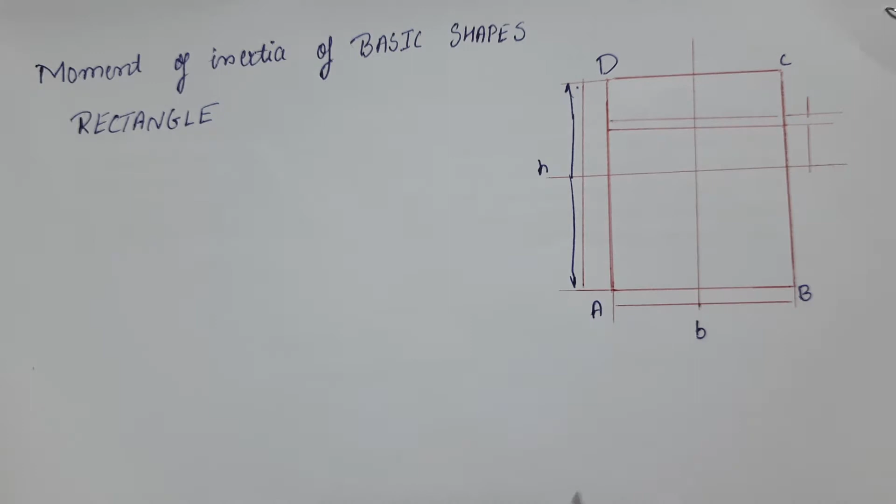So here let us choose a reference axis passing through the centroid of the rectangle. Let this be xc, and this be yc. So this is our reference axis here.

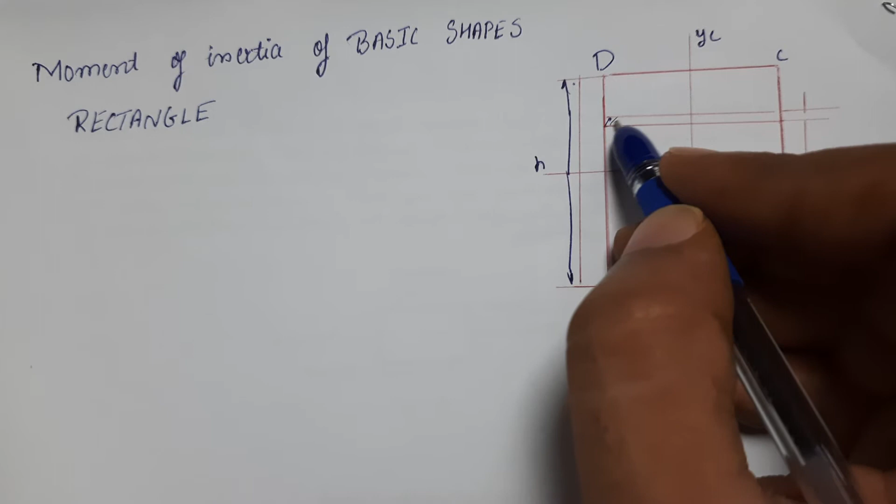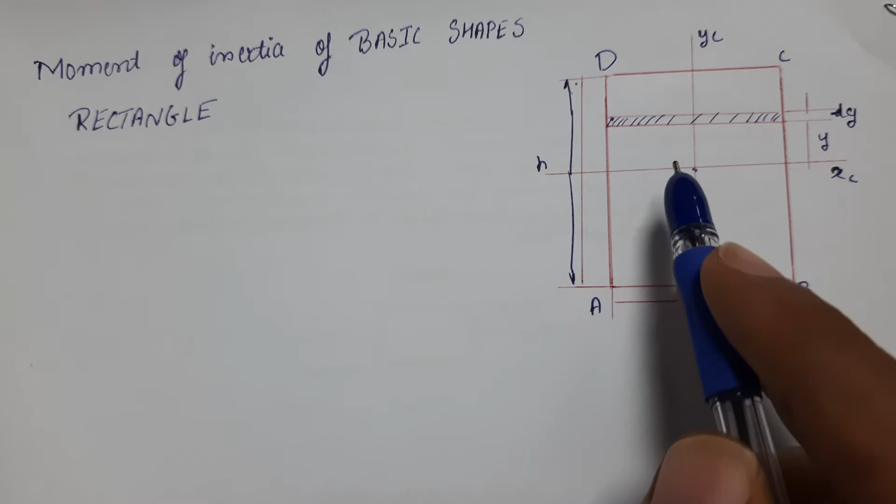Now let us also consider a small infinitesimal strip here of size dy at a distance of y from the reference axis xc, which is the axis from the centroid of the rectangle.

Now the area of this particular strip, dA, is equal to b into dy. So b is the base into dy here.

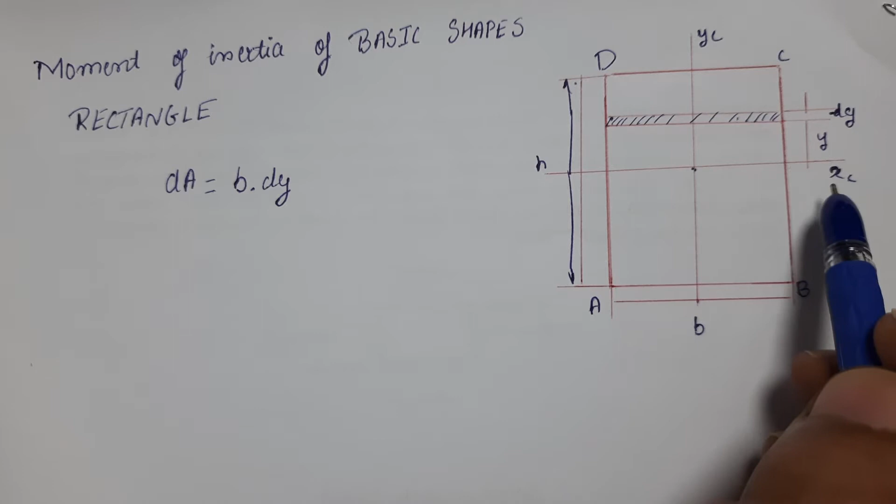The moment of inertia of the strip about xc, the centroidal axis, is given as di xx is equal to y square, that is the square of the distance, into dA. So dA is equal to b dy, so we can write it as y square into b into dy.

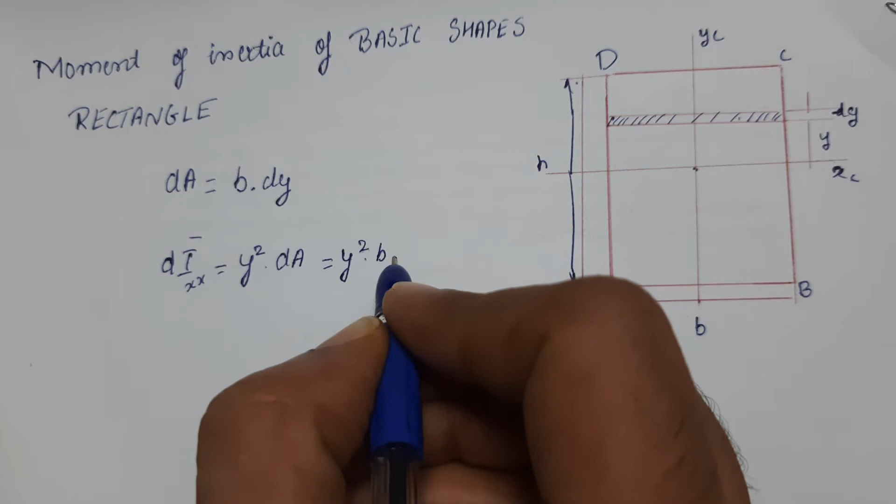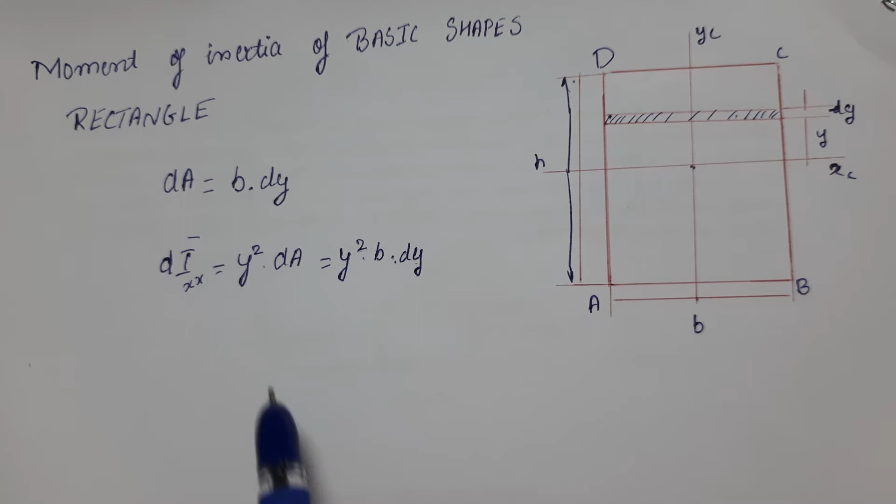The moment of inertia of the entire section about xc is obtained by integrating this equation. So integrating dixx equals y square into b into dy will give us ixx.

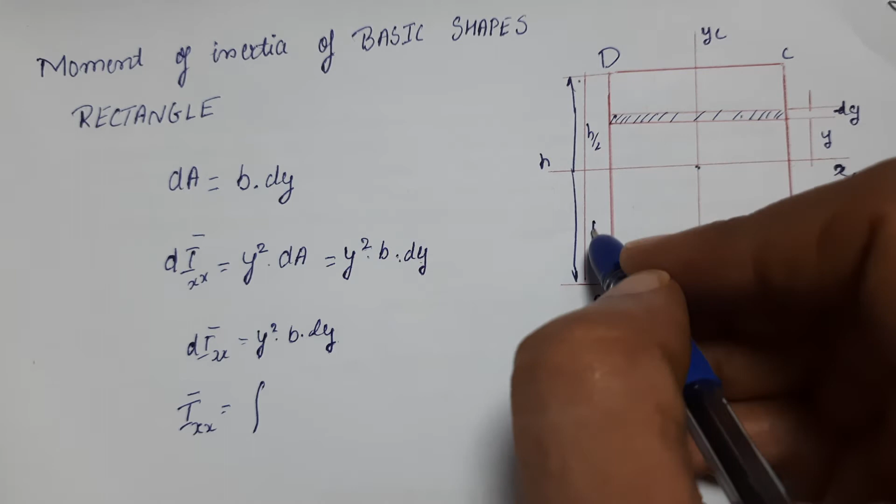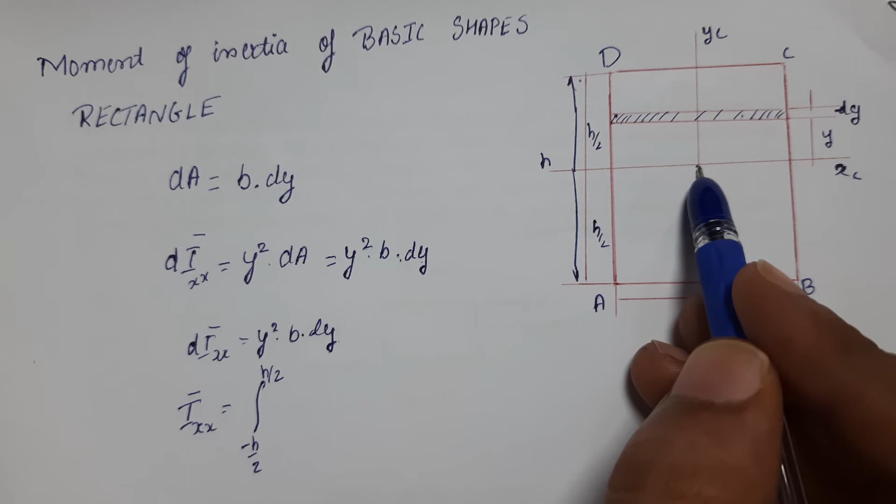Ixx subscript xx is equal to the integration, taking the range from minus h by 2 to plus h by 2, since we are considering this as reference, of y square into b into dy.

So we can write this equation as b into y cube by 3, evaluated from minus h by 2 to plus h by 2.

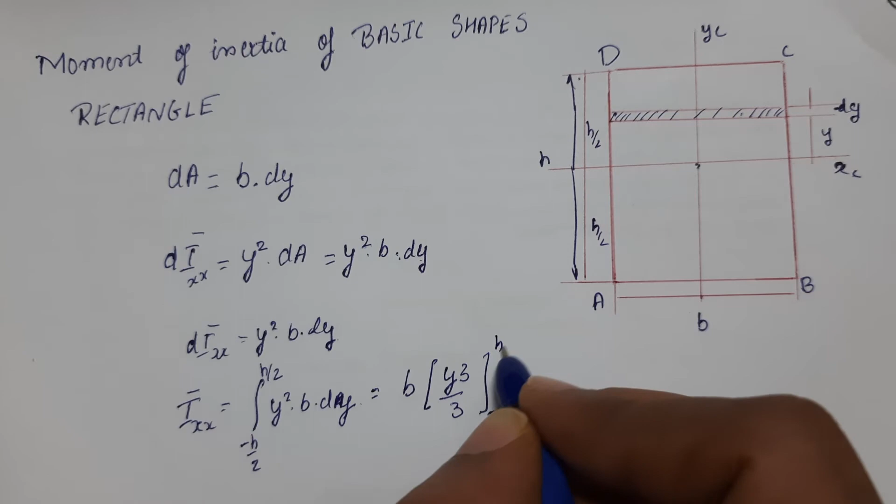So substituting this equation, what we can write down is ixx can be written as b into h cube by 12. You can substitute this and you will get this value.

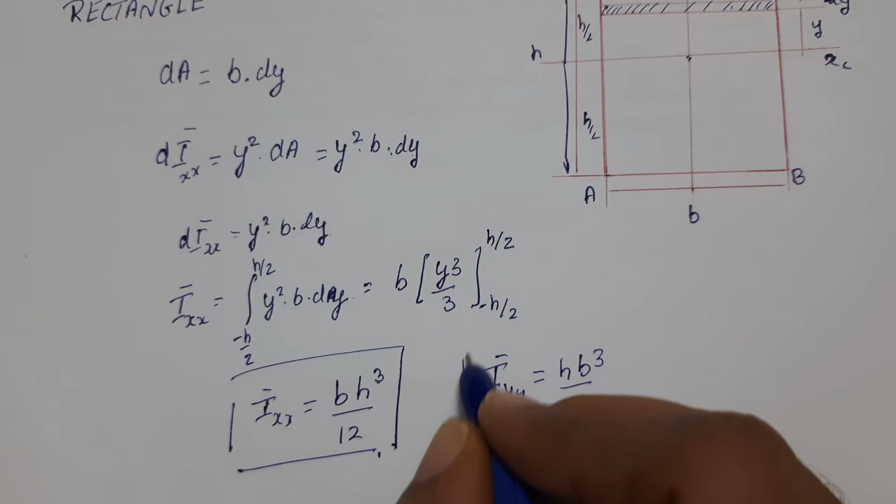Similarly, iyy dash is equal to h b cube by 12. This is obtained if you take the strip along this axis here.

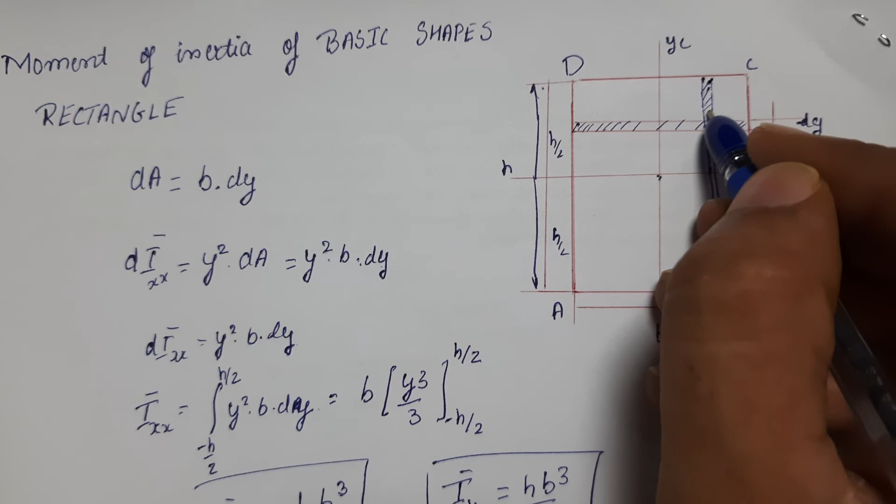So this is the moment of inertia about the centroidal axis.

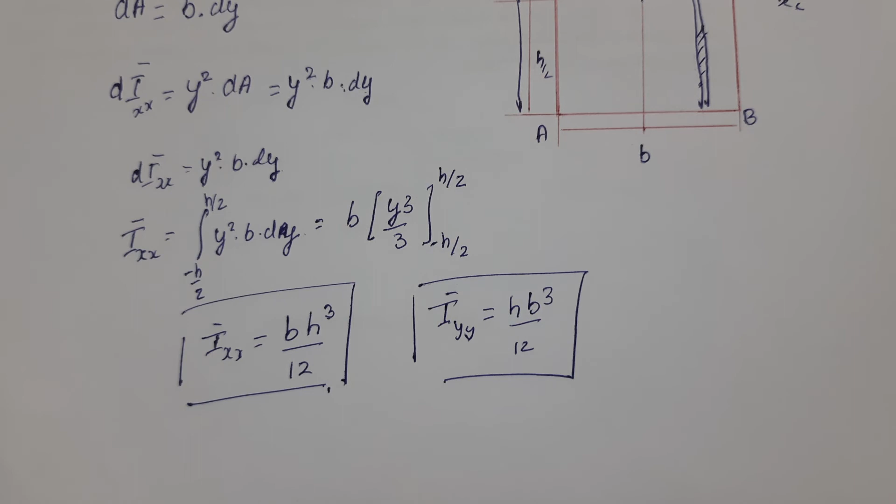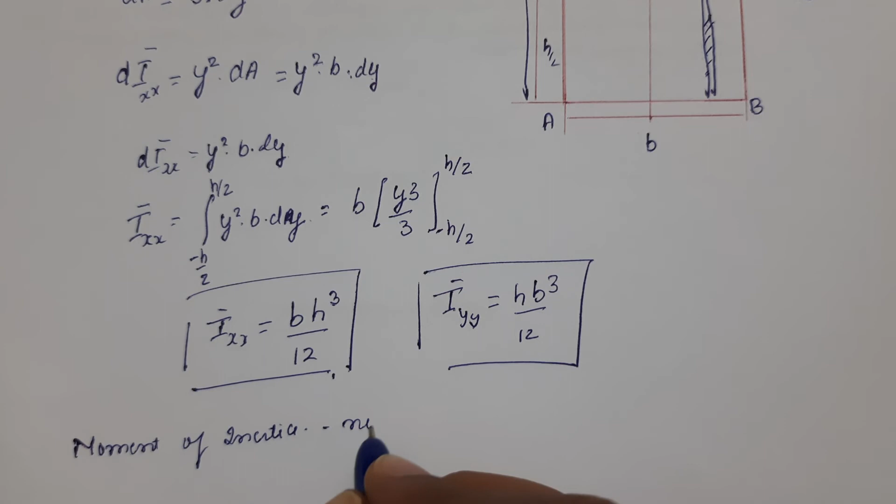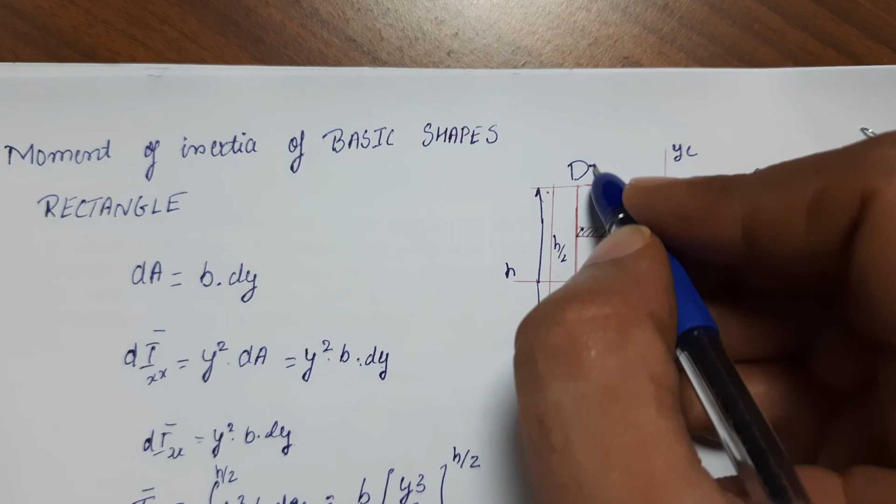Now if you take the non-centroidal axis, moment of inertia about the non-centroidal axis, that is if you take x here and y over here, x here and y over here, so we get it as...

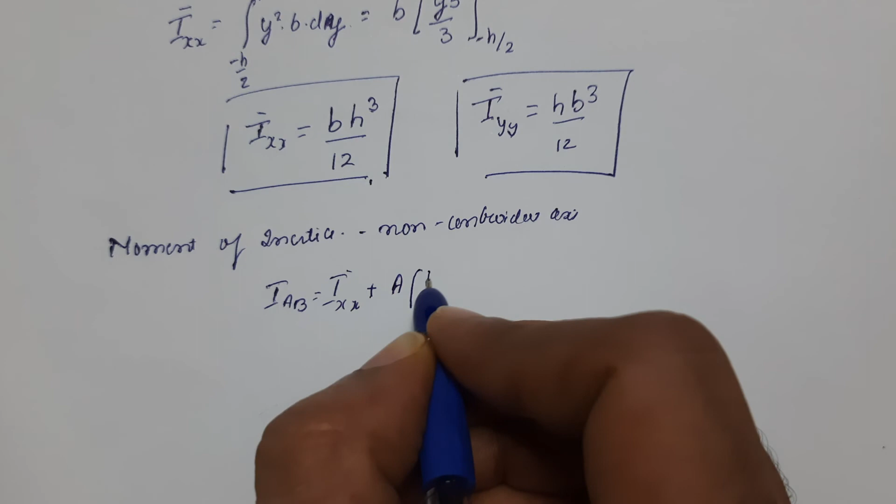IAB is equal to IXX plus A into h by 2 the whole square. This can be written as BH cube by 12 plus BH into h square by 4.

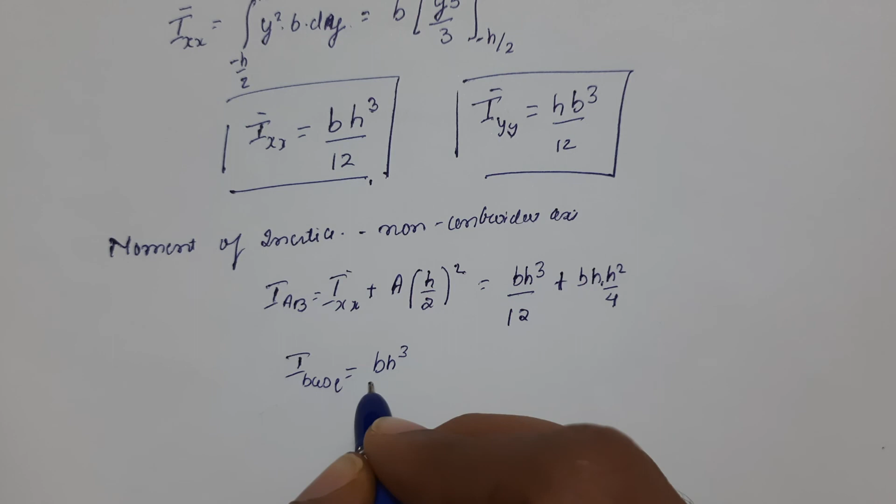Therefore, the I base is equal to BH cube by 3. Solving this, we'll get this.